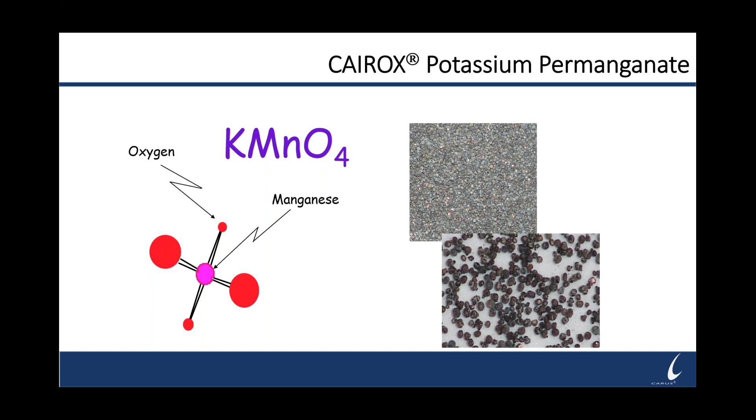So you really have two options when you're using permanganate for disinfection byproduct control. You can use CAIROX Potassium Permanganate, which is available as a dry crystalline material. Pictured on the right-hand side of the screen, you can see it looks like purple sand, and in close-ups it even looks darker purple. CAIROX is potassium permanganate based. You're only going to typically find it in the field in granular crystal form. It has a very high bulk density at 90 to 100 pounds per cubic foot.

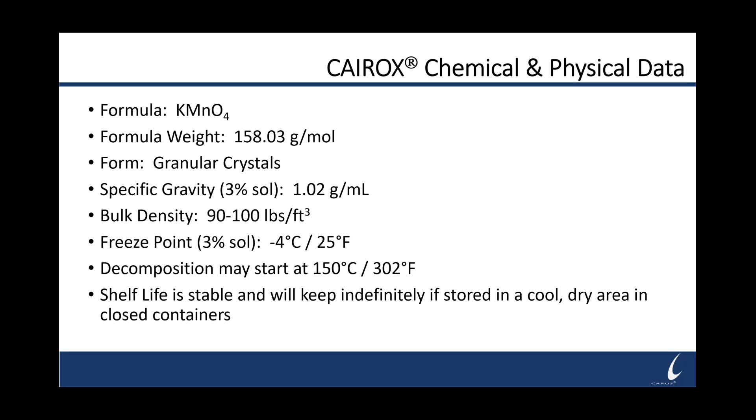Shelf life for this product is stable, and it will keep indefinitely stored in a cool, dry area in closed containers. Meaning if you have this product in a sealed container a year from now, 5 years from now, 10 years from now, it's still going to be the same percent active. CAIROX Potassium Permanganate is typically greater than 97% active as the dry product. Now you may ask yourself, why do you find CAIROX Potassium Permanganate only in the dry form? Well, it's really because of the solubility of potassium permanganate. At room temperature, the max solubility for potassium permanganate is 5% in solution.

Most customers are going to use the permanganate in one of two ways. They're either going to make a batch of permanganate solution. Typically when they do that, it will be a 3% solution, that'd be a 1/4 pound of dry permanganate per gallon of water. And they might make up a 100-gallon tank, a 1,000-gallon tank of that solution, and then meter that into their application point. You're going to need a mixer in that tank and at least a good 15 minutes of mixing to get a 3% solution concentration.

Now, available packages, the product is available in 55-pound pails, 330-pound drums, and 3,300-pound cycle bins, along with bulk. And we have customers that use all those different packages depending on their application.

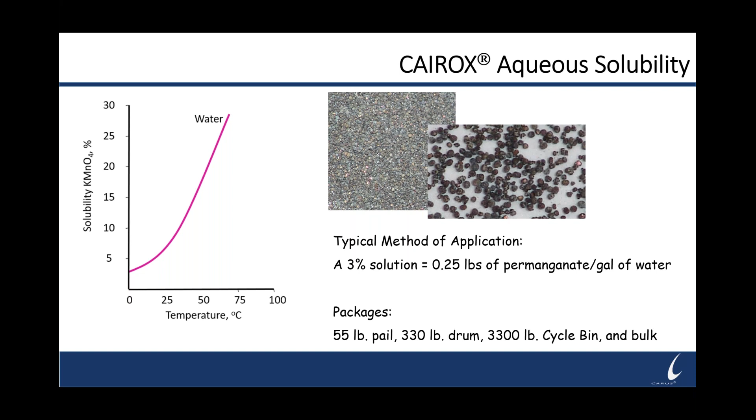The other main product that you have when you're using permanganate would be CARUSOL liquid permanganate, which is sodium permanganate based. It's going to look like a dark black solution, but then as you dilute it down, it's going to take on the same purple characteristic that potassium permanganate solution would as well.

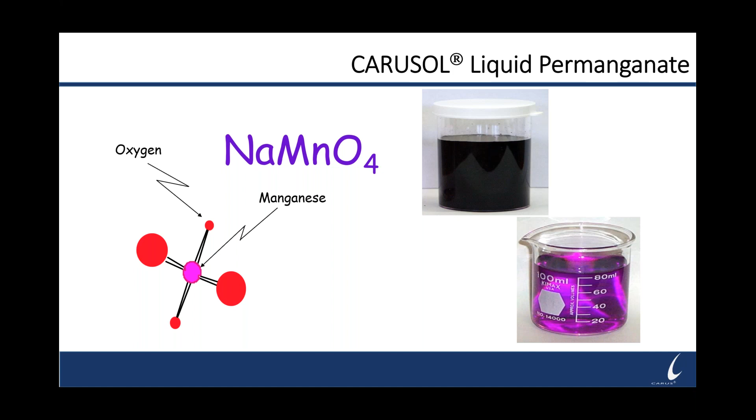CARUSOL liquid permanganate is only available in the liquid form. You're never going to find it in a dry form. It's sold as both a 20% solution and as a 40% concentrated solution. The same thing here though as with the dry product. The shelf life for the CARUSOL liquid permanganate is stable. It will keep indefinitely if stored in a cool, dry area in closed containers.

So if you buy the product in drums or totes or bulk, 20%, 40% solution, it will stay at that concentration a year, 3 years, 5 years from now. It will stay at that same exact concentration. Generally, we recommend that customers plan on holding the product for about a year and then turning their stock over in a year. But we do have some customers that buy bulk and it takes them 2 years to work through the bulk tank. And there's no loss in strength during that time.

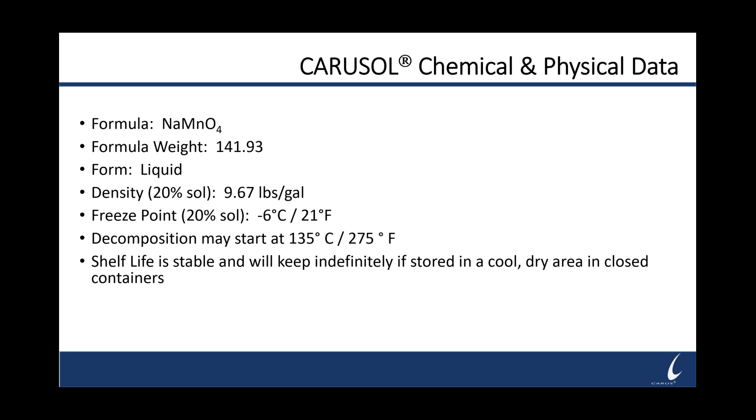Now, one of the reasons that we would sell the CARUSOL liquid permanganate at a higher concentration is because of the switch from potassium permanganate to sodium permanganate, we greatly increase the solubility in water. So you can see the curve here, which allows us to sell both 20% and 40%, and they'll be that way at room temperature. The product is available, like I said, in 55-gallon drums, 250-gallon IBCs, and bulk. And it's probably pretty typical for our customers to either have a bulk tank or to purchase it in the IBCs.

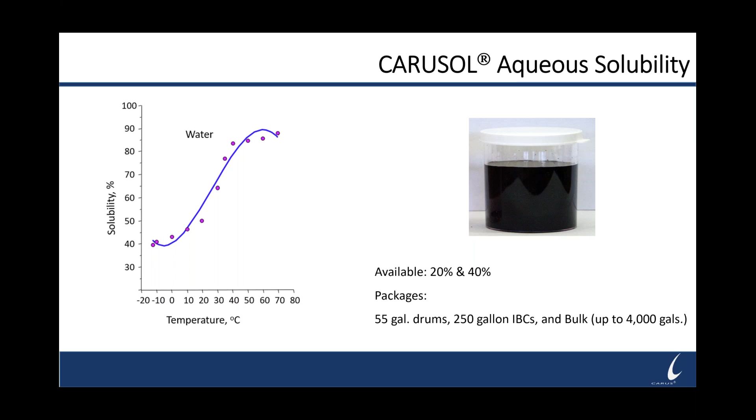One thing to keep in mind when you're handling permanganate is when you dose it into the drinking water, it's going to have a very distinct characteristic color to it. Depending on the level of concentration you have, it's going to look faintly pink at low levels of 0.5 to 1 milligrams per liter. And then as the concentration goes up to 5, 50 to 100, it's going to look much more purple in coloration. The sodium permanganate at 20% and 40% looks dark black because of how high the concentration is, but as you dilute it down, it will take on the same purple color characteristics.

One thing to keep in mind is when we talk about permanganate concentrations, we're really talking about the concentration expressed in milligrams per liter, which is also equivalent to parts per million when we talk about a dosage.

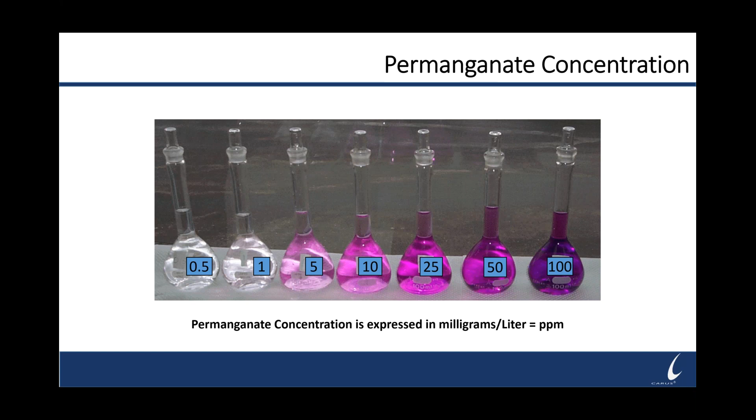Now, there are some industry standards out there for the application of permanganate into drinking water. There is the AWWA B603-16 permanganate standard that lists what quality product you should get for both potassium permanganate and liquid permanganate / sodium permanganate out there. Our product meets the NSF standard 60 for a drinking water additive, and you will see it on our literature and on our product labels on our containers as well. You want to make sure for a drinking water application that you have the NSF standard 60 certification in order to use it in your drinking water plant.

Now, when we talk about permanganate being used in drinking water treatment, there's a lot of applications, and we're specifically going to talk about disinfection byproducts today. But also keep in mind that as permanganate's reacting with things that can cause disinfection byproducts, there also are other components in the water that you will react with. Probably the quickest things to react are iron and manganese oxidation. You also have several taste and odor compounds that will react immediately.

And depending on if you have colored water coming in the door, you may react with some of the things causing color. And then in groundwater applications, you would have a reaction with arsenic and some adsorption of radium onto the manganese dioxide you form. So one of the things you want to keep in mind when you're applying permanganate for disinfection byproduct control, you need to keep in mind that we will also react with these other constituents in the water as well at the same time.

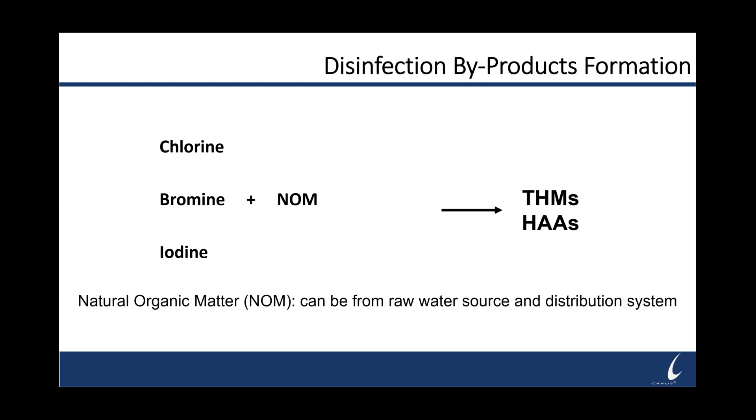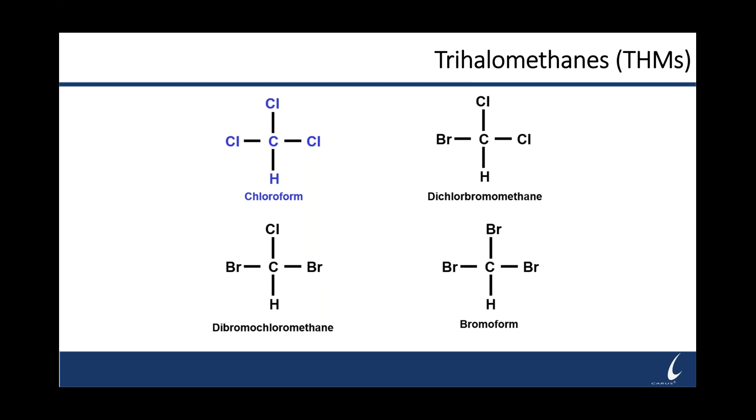Now, when we talk about the two types of disinfection byproducts, there's trihalomethanes, THMs for short, and there's 4 of them that we measure in order to meet the regulation. Typically, if you're feeding free chlorine, chloroform is going to be the one that you're going to see at the highest level. But what they'll give you in your report is a total trihalomethane number, so a THM number. But usually chloroform is the one that's the highest.

With haloacetic acids, HAAs for short, the regulation measures 5 of them, and you'll see a spread across them. Typically, they're referred to on your report as HAA5s, and it's these 5 compounds that they measure.

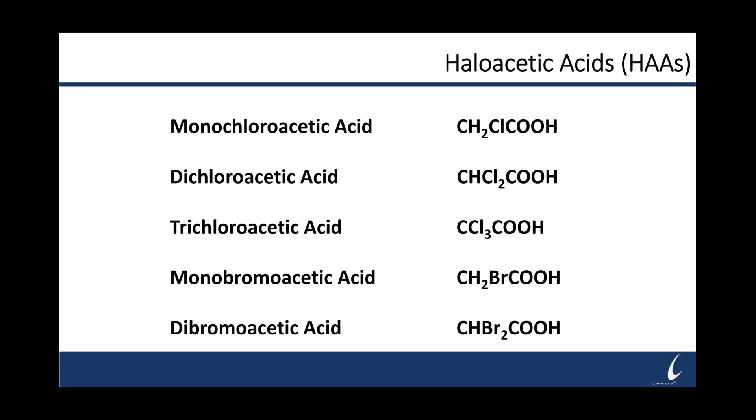So there are currently 2 rules that regulate disinfectants and disinfection byproducts out there for drinking water plants. The stage 1 rule was to reduce the exposure to disinfectants and the disinfection byproducts out there. The original regulation was put into effect because there have been links between disinfectants and their byproducts that can cause increased rates of cancer from people that drink the water over a lifetime, and also reproductive effects like miscarriages.

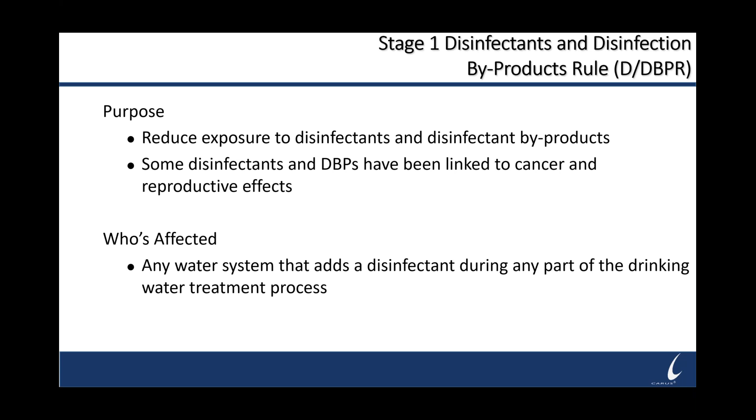The stage 1 regulation affects any water system that adds a disinfectant during any part of the drinking water treatment process. So basically, it regulates all water systems. The stage 1 regulation established the maximum contaminant level, MCL, for total trihalomethanes at 80 parts per billion, and for total haloacetic acids at 60 parts per billion.

The monitoring requirements for the stage 1 regulation were samples were taken quarterly, and you were allowed to do a system-wide running annual average. Now, all systems were supposed to be in stage 1 compliance by January of 2004. So this rule has been on the books for a long time.

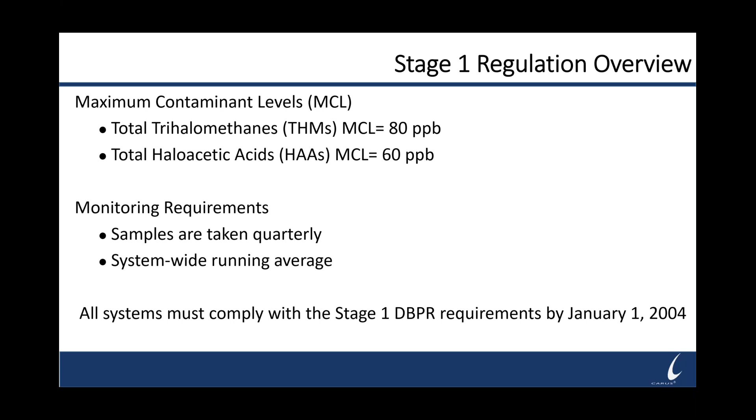The stage 2 rule built on the stage 1 rule and established a couple different things that systems were going to do to be in compliance. There was an initial distribution system evaluation, meaning you were going to go back out and do evaluation of sites with high disinfection byproduct concentrations. The old rule basically established that each site was valid for both THMs and HAAs. The new evaluation had you determine which sites were the highest for THMs, which sites were the highest for HAAs, and you might have separate sites for each of them in your distribution system.

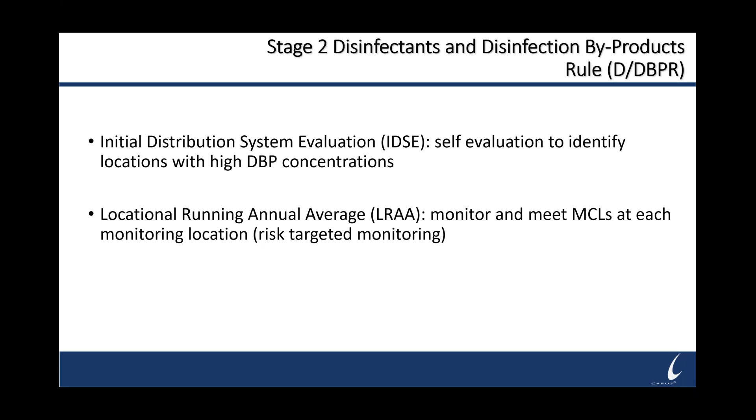Also, the bigger change was it was a locational running annual average, which meant you needed to monitor and meet the MCL at each individual location. So you weren't allowed to average the whole system together anymore.

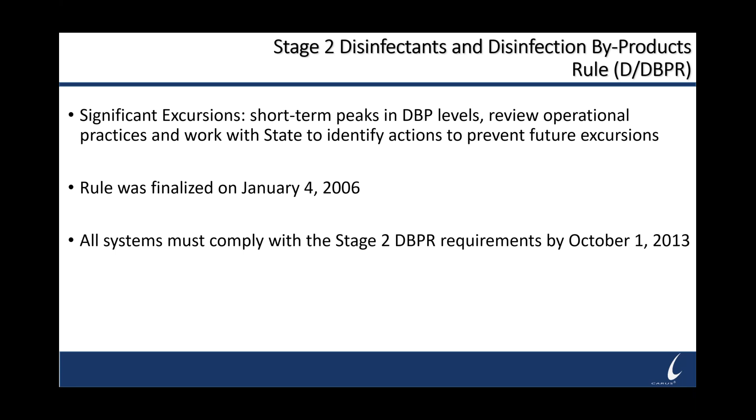The rule was finalized in 2006, and in 2013, all systems were to comply with the stage 2 disinfection byproduct rule. US EPA and many state organizations have stated that the disinfection byproduct rule is one of the most violated rules in the US after it went into effect, followed closely by the lead and copper rule as well. So these are 2 rules that municipalities still struggle with today.

So there are a couple different disinfection byproduct control strategies that you can take. Obviously, if you're using chlorine at the front of the plant for pre-oxidation, just moving that chlorination to the back of the plant, either right before filtration or right after filtration, can reduce the amount of disinfection byproducts that you form, because your coagulation process in your plant is designed to remove organics. You'll get TOC reduction, natural organic matter reduction at the front of the plant. So allow that process to remove those compounds and then add your chlorine at the back of the plant where you have lower levels.

What to keep in mind though is if you are using chlorine as your pre-oxidation, you're no longer going to have it there to oxidize iron and manganese to remove it. You're not going to have it there to remove taste and odor compounds. So you'll probably have to add something else as a pre-oxidant. Also, by moving the chlorine, you're delaying your disinfection. So you need to make sure, if you're going to move it back, that you have enough CT credits to get your chlorine contact time at the back of the plant in your clear well to meet that standard.

Now, one of the ways you can replace chlorine at the front of the plant is pre-oxidation with permanganate. Ideally, we would love to apply the product at the front of the plant or, if available, at the raw water intake. What this allows is the permanganate to react with the natural organic matter in the raw water. That will modify it. Your coagulation process will then precipitate the natural organic matter out of the water.

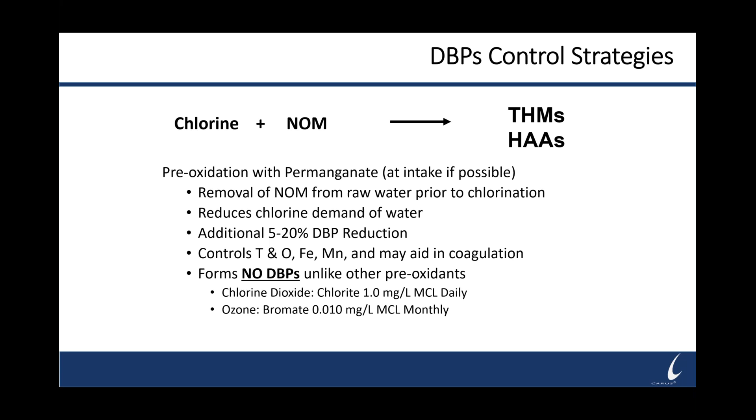So when we first talk about using permanganate for disinfection byproducts, we really want to talk about how do you establish a dosage. And the easiest way to do that is each water is going to be unique, and you're going to want to do a permanganate demand jar test where you dose various levels of permanganate to determine how much permanganate makes sense in your plant based on your application point.

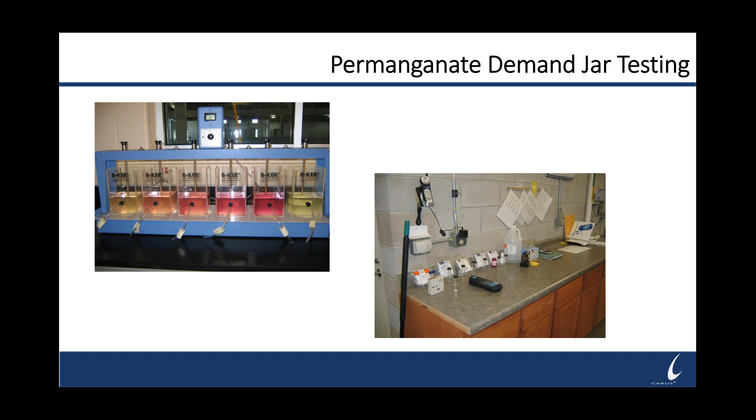Like I mentioned earlier, the best treatment plant injection point would be at the raw water source. So if you have a lake or a reservoir and you have a pump station there where you can feed permanganate, that allows you to have all the reaction time as the water carries into the rapid mix at the plant. Some plants will be based right at their raw water source, so they're right on the lake or reservoir, and there's really not much time gained because maybe you only gain 60 seconds or a couple minutes before your rapid mix. In that case, definitely add it at your rapid mix at the plant.

Permanganate then has time to react in the rapid mix and in your flocculators, and ideally your control point would be to have no permanganate residual carrying into the sedimentation basin because you want the manganese dioxide that's formed to settle out in your settling basin. So you'll feed the permanganate in that very first part of the plant, the rapid mix and the flocculators.

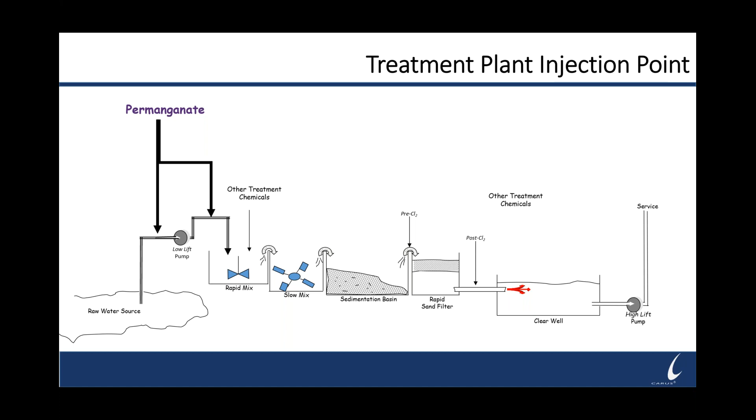There are several factors that affect the permanganate reaction. So you'll want to do this jar test right on your site. Some of the things to keep in mind: what oxidizable material, and at what concentration, do you have in the water at your application point? One of the easiest things is how much soluble iron and manganese do you have coming in the door at the front of the plant. You can calculate that demand pretty easily. The organics is something that you'll want the jar test for.

How much time do you have for the reaction? Do you have 20 minutes of contact time? Do you have 60 minutes of contact time? Run the jar test for the full amount of time to determine how much permanganate you can feed. What's the temperature of the water? Typically in warmer weather, permanganate reacts quickly. You'll have a higher demand. Plus, in the summer months, you might have algae blooms and other things that will increase the demand at that time.

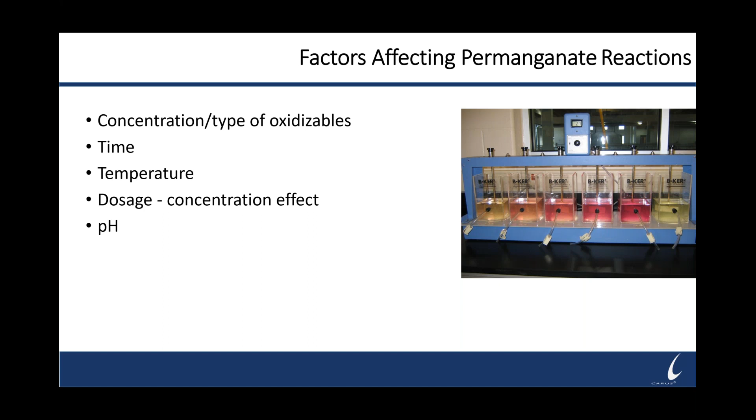And then also pH affects the quickness of the reaction. Higher pHs make permanganate react quicker. So if you're in the mid 7s, that's better than being in the low 6s. Typically, we want a minimum for disinfection byproducts of about 15 minutes. We do need some time to react with the organics and to form some manganese dioxide, which your coagulation process will then grab onto and it'll settle out in your settling basin.

You do want to try to separate some of your treatment chemicals. If you add permanganate at the same time that you're adding carbon, carbon will adsorb some of the permanganate residual, so you'll lose a little bit of the effectiveness of your permanganate by feeding them at the same time. Also, ideally, you'd like to be before your polymer addition or coagulant addition so that you form some solids prior to your coagulation. And ideally, you really don't want to feed chlorine at the exact same point as permanganate, because as you're reacting with your organics to remove them, if you're feeding chlorine, you'll also form THMs and HAAs at the same time.

And once you've formed a THM or HAA, permanganate can't react with it any longer to remove it. So you really want that reaction done prior to adding the chlorine. Like I said, if you feed at the raw water source, you probably want to carry a slight residual into your rapid mix. If you're feeding at your rapid mix in your plant, you probably want to carry a slight residual to the end of your flocculators, usually somewhere between 1/10 and 2/10 of a part.

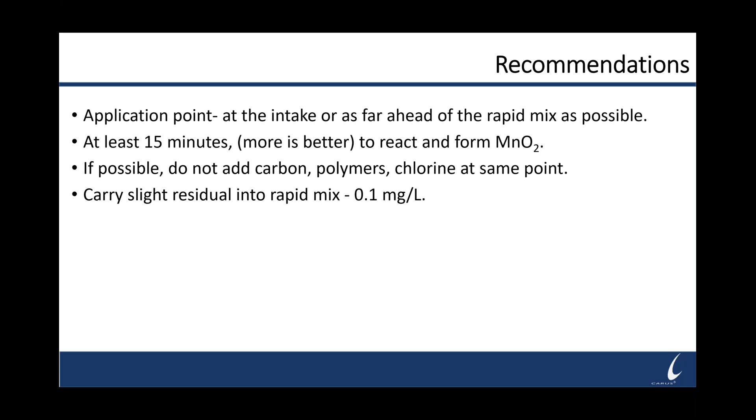The jar test that we typically use in the field for determining how much permanganate to feed for disinfection byproducts, we call a permanganate value method. What we're going to do is look at how much permanganate can be consumed in a specific amount of time. And that will take into account the temperature, the pH, how much permanganate you've added, and then what type of oxidizable materials you have in the water.

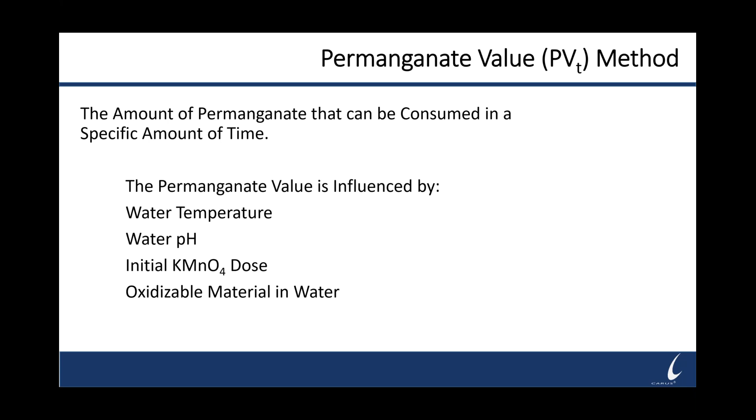What we'll do for this test is obtain raw water and then immediately do the jar test. Record the temperature so you have an idea whether it's cold water or warm water when you're doing the test. Separate out your sample. Typically, we'll run somewhere between 5 and 6 1-liter samples. That allows us to vary the permanganate dose. The more jars you run, the closer together you can have the permanganate residuals.

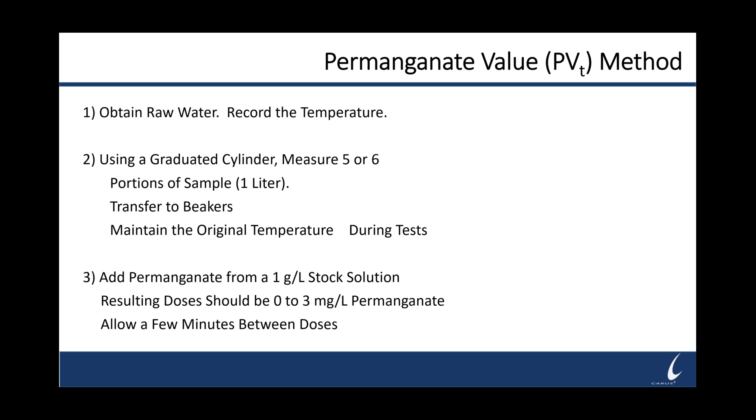What you want to keep in mind is typically we're going to dose somewhere between 0 and 3 milligrams per liter. And ideally, usually 0 to 2 is probably where most plants fall. So usually somewhere between half a part, 1, 1.5, 2 parts. Now, when you're dosing the permanganate into the jars, you do want to give yourself a few minutes between the doses so that you can come back and measure residual after your set time.

One of the first things you do when you're setting up for the jar test is decide where you are going to apply the permanganate, and then where you want to have permanganate residual, so how long. So if you're feeding it at the rapid mix and the detention time in your plant between rapid mix and flocculators is 30 minutes, then you'll want to run this jar test for approximately 30 minutes to give you an idea of how much permanganate residual you can carry for that 30 minutes.

After that set amount of time of 30 minutes, you can come into each jar and measure your permanganate residual. A lot of times when you're running this jar, because you've got plenty of sample, you might actually run several different times. So if your full time is 30 minutes, you might run one at 15 and then another one at 30, just to see how much difference you have or how much permanganate is reacting over time.

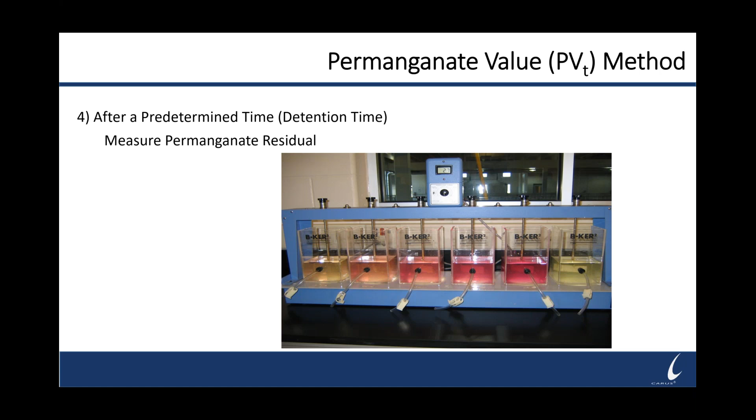Now, when you're measuring permanganate, there's a couple different ways to do it, but the easiest way in the field is to use the DPD powder pillow that you use for free chlorine. The instrument you have will determine what powder pillow you're going to use, but we're really using a modification of the chlorine DPD powder pillow in order to get a permanganate residual reading. Keep in mind, since we are using the DPD free chlorine powder pillow, that if you have chlorine or ozone or chlorine dioxide or manganese dioxide in the sample, it will interfere and color the powder pillow.

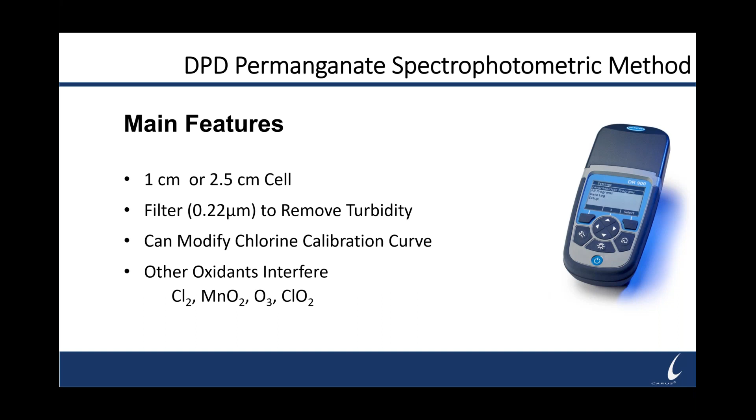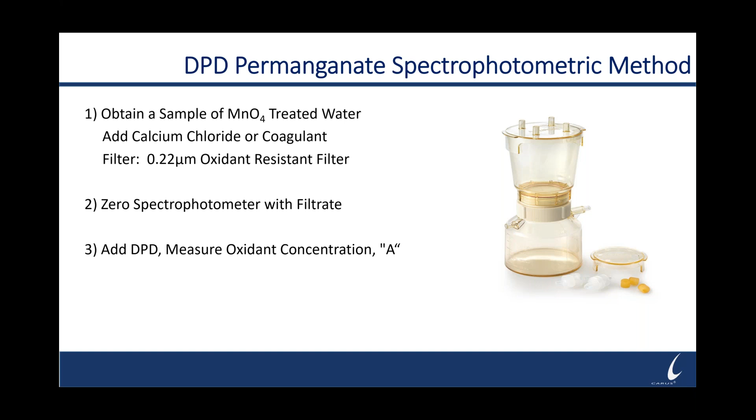What you're going to do is obtain a sample of that water from the jar. If it's in the part of the process where you have the coagulant, well, then you're already going to have the coagulant added so that you can bind up any turbidity and remove it. And then you're going to want to make sure that you filter this sample to remove the solids, because that will skew your results high. After you filter the sample, zero the spec with the filtrate, add your powder pillow, mix it, and then immediately read it.

Based on the reading that you have, it depends on what product you're using. If you're using potassium permanganate, you need to multiply your DPD reading by 0.89 to determine how much actual permanganate is there, because there is a slight difference between chlorine readings and permanganate readings. If you're using sodium permanganate, the reading actually ends up being the same. You will see the same pink color that turns darker red when you add the powder pillow to the sample.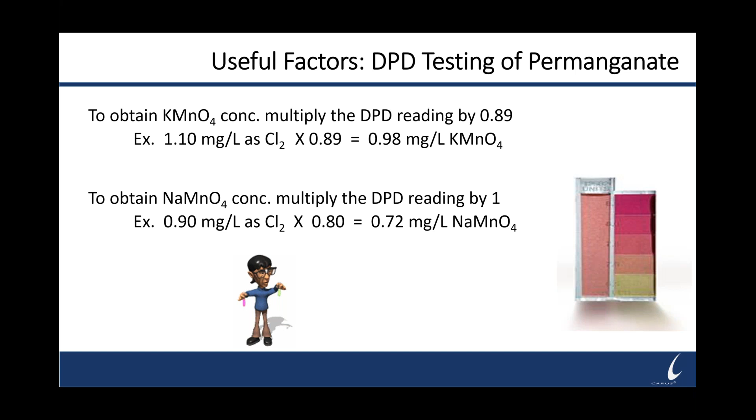So this gives you a dosage where you would start in the plant at 0.4 milligrams per liter, and 15 minutes later you would have no permanganate residual left. So it's a good way to establish your initial dosage. Once you start feeding in a plant, you can then measure residual in the plant at a control point and then adjust your dosage without having to go back and do the jar test repeatedly. The only time you would repeat the jar test is if you think there's a significant change to your demand, and maybe you want to do a jar test just to confirm it before you turn it up in the plant.

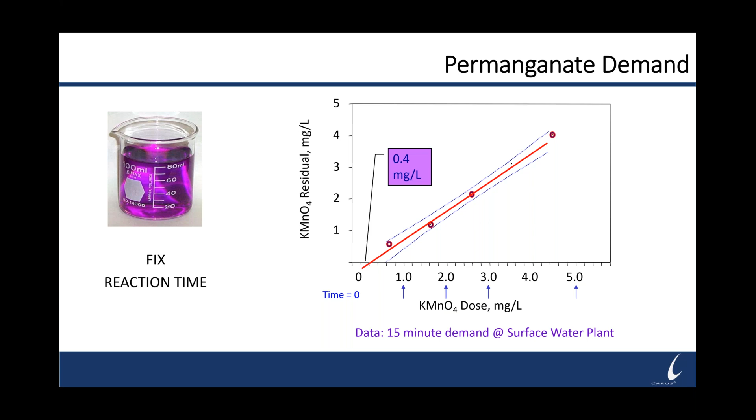So we have several different case studies with our different products looking at disinfection byproduct removal. Our first case study here was a plant that was looking at CARUSOL versus free chlorine. And they had really 2 types of issues in this plant. They were a groundwater plant under surface influence. They had 5 MGD that they treated through 2 separate 2.5 MGD Actiflo treatment trains. So the water came into the plant and split into the 2 processes.

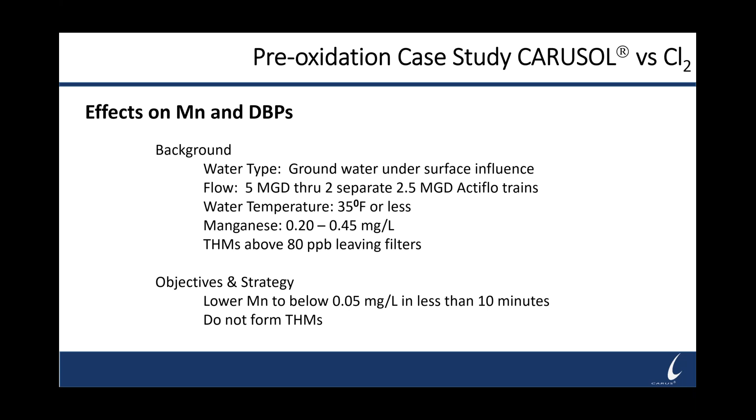Because they were under surface influence, the raw water manganese could vary depending on what was happening in the area. So if they had a lot of rainfall and runoff, the manganese would spike. And then if they didn't have that, the manganese would go down to a lower level. Now they had tried using chlorine to remove the manganese in the plant, and because they had to feed so much chlorine to oxidize the manganese, their THMs were over 80 parts per billion leaving the filters in the plant. So they were already in violation of the regulation before they'd even gone out to the distribution system. So they really wanted to look at, is there something that we can use to lower the manganese quickly in our process, and then also not form any THMs during that part of the process.

In the Actiflo process, we go from the flash mix where they're adding the permanganate, they're adding their polymer, and they're adding sand. They then go to a mix chamber where the sand and polymer stick together along with any solids. From there, they go to lamella separators, and from there they go to their finished drinking water filters. In this plant, there's between 10 and 20 minutes from the front of the plant to the filters as far as contact time, depending on what flow rate they were running at. So they treat their water quickly and have to get it out the door through the filters.

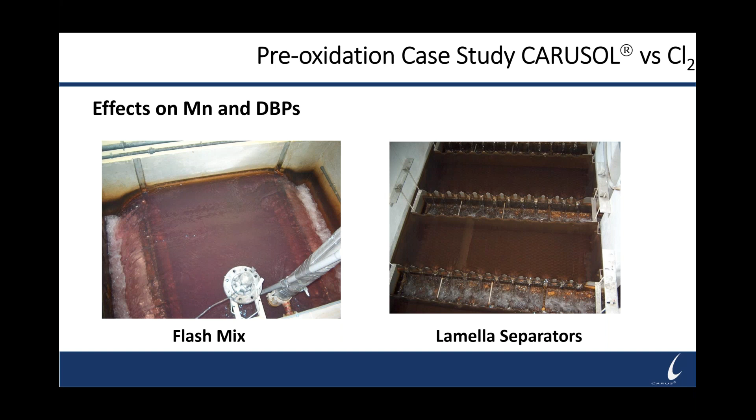When they were applying free chlorine, one of the things they struggled with, because the manganese level was variable, they would really have to crank the chlorine dose up to try to get the manganese down. There were times when they couldn't get the chlorine high enough based on their feed system to get all the manganese out, and so the water would go into the clear well at about 0.12 milligrams per liter as manganese. And then as it continued to react with the chlorine, they'd get brown colored water in the clear well.

With the sodium permanganate at the front of the plant, we were able to get the manganese going to the clear well down to 0.02 milligrams per liter, so very low, below the 0.05 standard. Also, because permanganate doesn't form any disinfection byproducts, going into their clear well, their THM level was at 0 versus above 80 when they were feeding chlorine. So we had knocked the THMs down before they added their final chlorine to the clear well.

Our second case study here, also looking at THMs, was Elsinore Valley Municipal Water, a 37 MGD facility, and they had THMs that could be as high as 130 to 140 parts per billion, and they also were getting some musty and fishy odor complaints out in the distribution system. Their treatment at the plant was anywhere from 2 to 3 milligrams per liter of potassium permanganate.

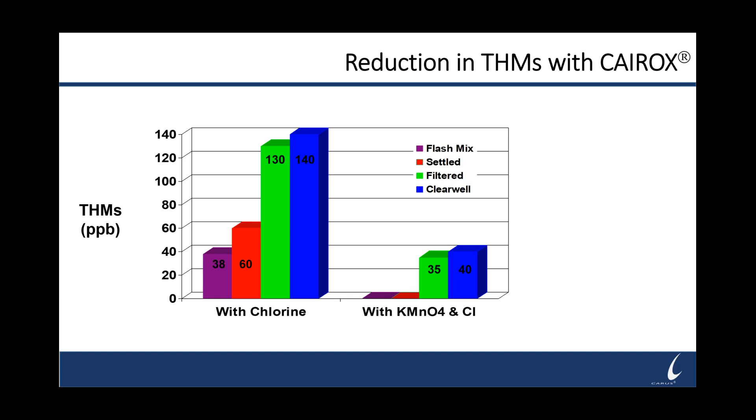So as you can see, that 140 to 40 part per billion reduction by moving the chlorination point and adding permanganate to the pre-oxidant was about a 70% reduction. Also, the switch from pre-chlorine at the front of the plant to permanganate also reduced the taste and odor complaints they had from 5 to 10 per month to 0. So they also were getting better taste and odor control at the plant after treatment. So a dual benefit.

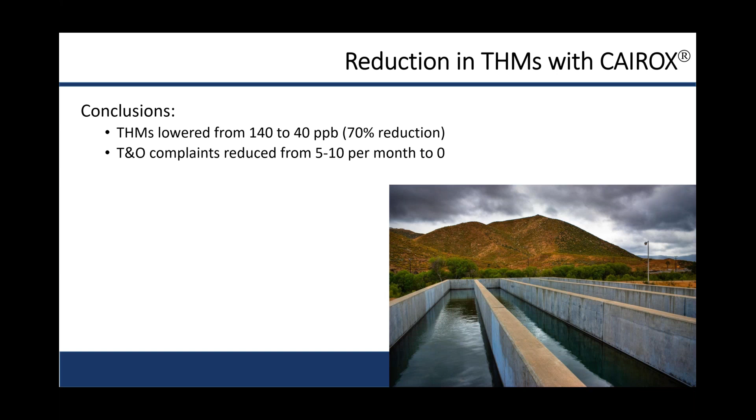Our third case study, switching it up a little bit, this plant was specifically looking at control of haloacetic acids, HAAs. It was a Southern Illinois water treatment plant, and they were surface water, about a 5 MGD average, and they were having issues with haloacetic acids in their finished water, anywhere from 14 to 150 parts per billion. They wanted to look at a couple different strategies for treatment. They wanted to get their HAAs to less than 30 parts per billion, so well below the 60.

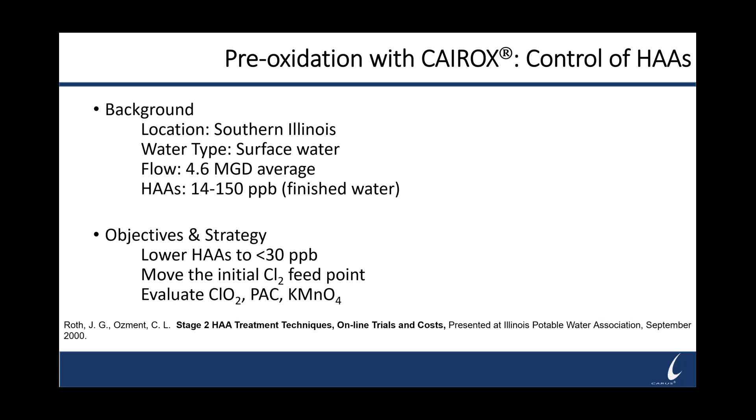And during that evaluation, they wanted to look at moving the pre-chlorination point to the back of the plant, and then also look at what would chlorine dioxide do as a pre-oxidant, what would potassium permanganate do as a pre-oxidant, and then also what happens if we use free chlorine and then add carbon to adsorb the HAAs that are formed. So a couple different treatment options.

What they looked at was all three options that they had considered: potassium permanganate, powdered activated carbon to adsorb the HAAs, or chlorine dioxide as the pre-oxidant. All of them would work to help them keep HAAs under control. But when they looked at the cost per 1,000 gallons, permanganate ended up being the cheapest cost per 1,000 gallons that they were treating at 0.011. Carbon was just a little short of double, and chlorine dioxide was just about double the cost. So obviously permanganate was the cheapest option and got them control of HAAs.

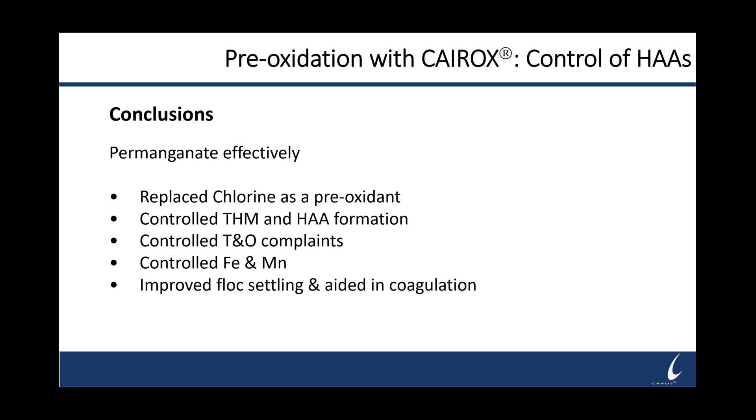Our last case study here was CARUSOL for THMs and HAAs. It was a southern US water treatment plant, averaged about 27 mgd on a day, and it was surface water directly from a river. They looked at moving the pre-chlorination point to above the filters from the river intake, and they wanted to start by applying sodium permanganate at the river intake at half a part.

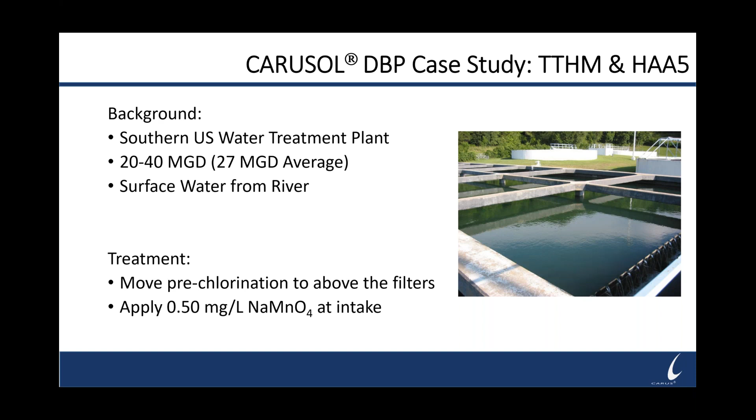The engineer in the plant wanted to look at two separate tests in this plant. So we looked at a winter test. So in the coldest months of January and February, what kind of benefit would we see? And then they also looked at a summer test, and you'll see that in both of these slides.

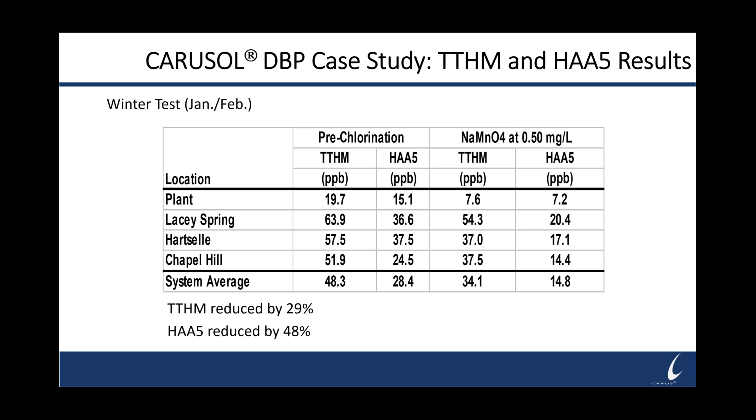In the winter test in January and February, typically THM and HAA levels are lower, and you can see across the board that their system average was about 50 for THMs in the winter and about 30 for HAAs. By moving the pre-chlorine and adding sodium permanganate in the front of the plant, we could drop the THM level by about 30%, and we could reduce the HAAs by about 50%.